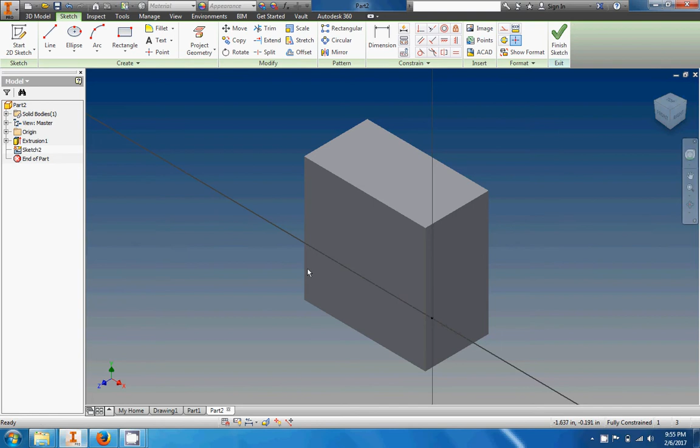Good times as usual. Today we're making the man. It's big man, the big man of the Automoblox right here. So you can see that I already started by making, not that one, I already started by making the base plate 0.575 by 0.575, extruded at 0.3 inches.

So we're going to start with this ellipse right here. Now it says I should use a construction line to locate the center. I think that is a fantastic idea. So I'm going to click the line tool, then switch on the construction button, and I'm just going to scan right here till I hit the midpoint. There it is in green. Then I'll go up until maybe I can find that midpoint right there somewhere. Does not seem to be liking me today. That's okay. So we'll just find another midpoint right here. There it is. Oh, look at that. I made it in there. Okay. So there's my midpoint right there.

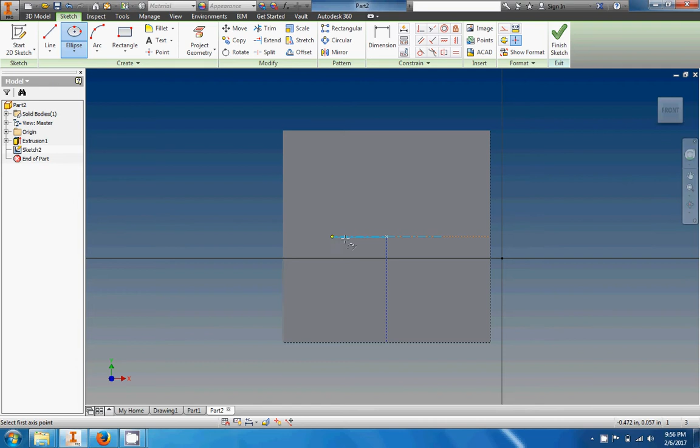Then I'm going to do an ellipse, and I'm going to turn off construction, so I just get my plain old ellipse. It'll be an object line. Then I'm going to make sure my line's flat. It takes, I believe, 3 clicks. The first click sets the center. The second click sets the length of the long axis. The third click sets the short axis.

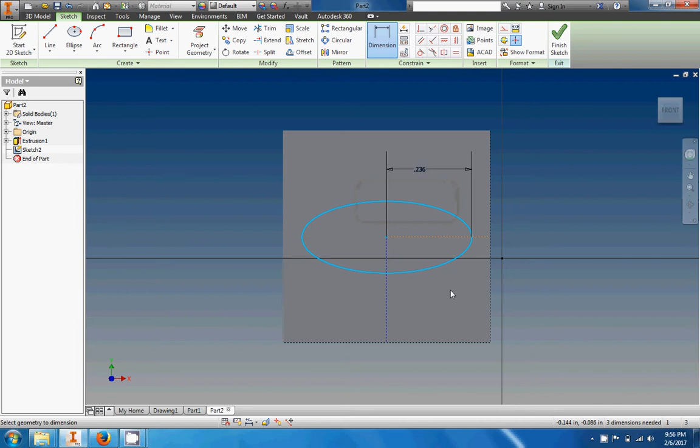All right, then we're going to dimension the ellipse in 2 directions. There's one. What is that one? It is 0.236. And then we'll dimension it in our vertical direction right here. That one is 0.155. There we go. So there's our ellipse.

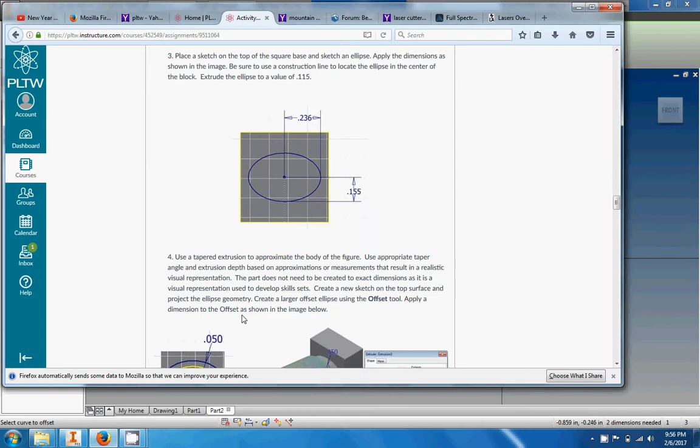And now I believe we're going to do an offset to the outside. Is that right? So we're going to use our offset tool right there, 0.05. We may have used offset already, making the wheel. There we go. Wow, it goes all the way to the edge. Is that what's supposed to happen? It is. Okay, cool. Then it recommends saving the file. I recommend saving the file as well.

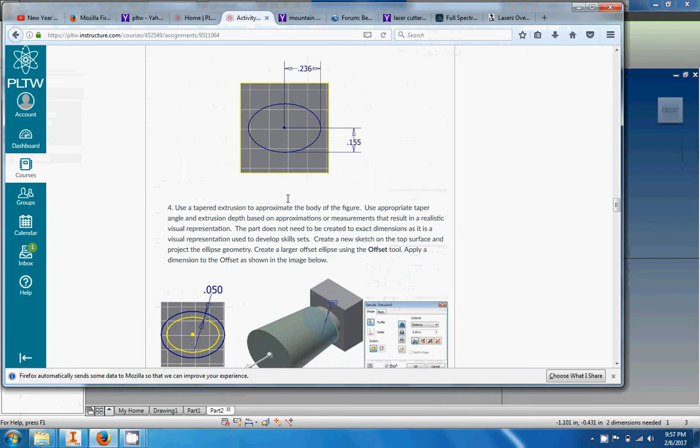All right, so let's see. Are we supposed to do an extrusion here? We are. And we're going to use a tapered extrusion to approximate the, okay. Oh, you know what? I think I skipped a step in here. My bad, guys. So what do we do? We extrude this first one right here. Sorry about that. We're going to extrude this thing in the middle, 0.115.

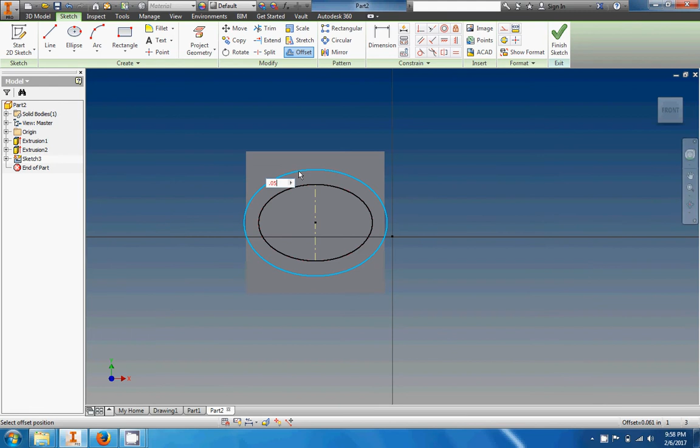There we go. Then we'll start a new sketch right here on the thing, and we'll project the geometry. We love that command. And then we'll go out here, 0.05. All right, there we go. Now we'll finish the sketch, and we'll do an extrusion of both the outside and the inside ring there. Now, if I go over here and I want to do my taper, I can set my taper angle.

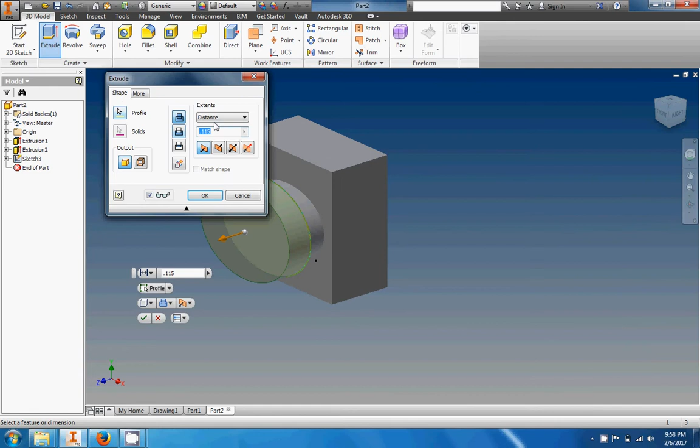So let's look at the drawing here, kind of get an idea. Now, they don't really give us approximations. They say maybe 0.84 for the extrusion depth. They don't really give us any clues as to the angle. So let's just go with what looks good. First, let's set this to 0.84. And then let's just choose what we want.

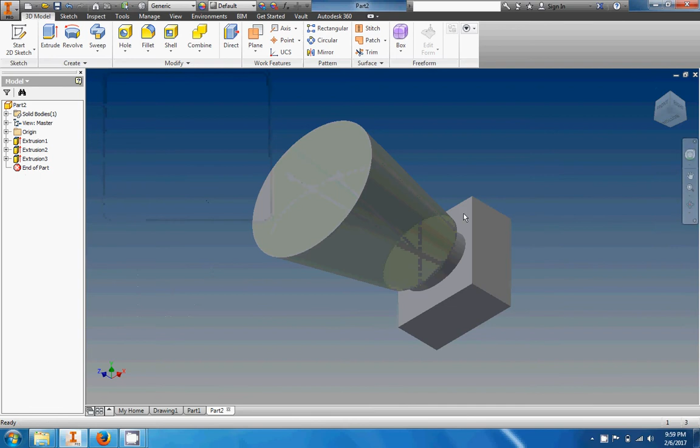Let's start with 1 degree. No, 2 degrees. Oh, 12 degrees. Oh, that looks okay, actually. Maybe we should go 12. That's a big, yeah. We want him burly. We want a big guy. Okay, so we'll go with 12 degrees right there. You could choose a different angle. Probably won't matter all that much. Whatever you think looks good is fine with me.

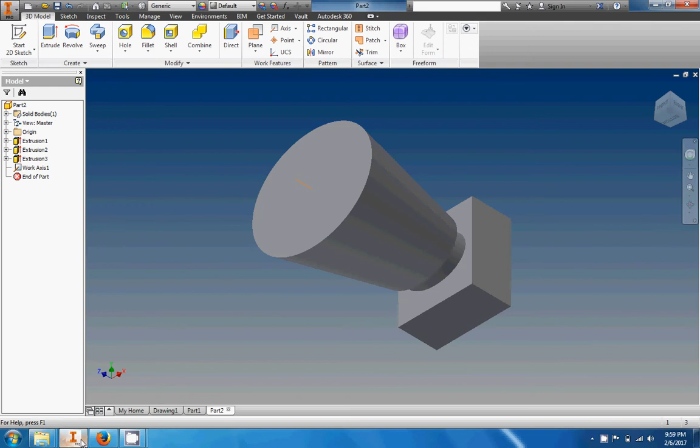And what are we going to do now? We're going to place a work axis through the center point along the long axis of the ellipse of the body. Okay, so we're gonna go to our 3D model, and we're gonna put an axis in there, and I'm gonna choose the specific axis I want, which is through the center of a circular or elliptical edge. Then I'm gonna find an elliptical edge that I can go through. There you go. Perfect. Got my axis right there in the center.

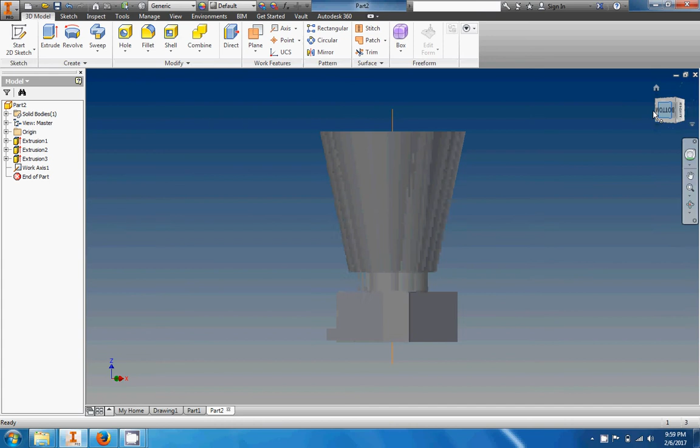So let's see. What do I need to do? I'm going to choose a face of the square base that is parallel to the long axis of the ellipse that was used to create the body. So this is like the long axis right here. And then if I go over here, that's the short axis. So I need to take the long axis, and I'm going to start a 2D sketch right there.

Then I'm going to pull it into view, and I'm gonna slice graphics. I believe that's under view. If you can't find it, you can always go up to here. Is it working? Slice graphics, and it'll do that for you. Perfect. Okay. So let's see what else. Hint: slice graphics, project geometry.

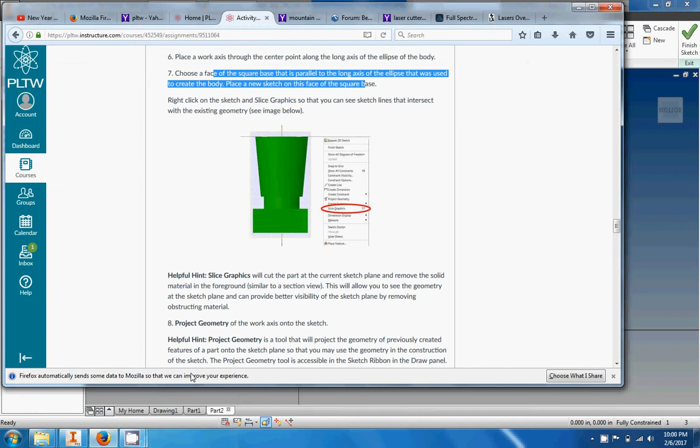Yes, we know about those. We've used them before. So that will approximate the curve of the shoulders on the figure. Do not worry about the exact dimensions. Provide a reasonable approximation of the shoulder figure. Complete the sketch with lines that will encompass all of the existing geometry of the figure below the arc.

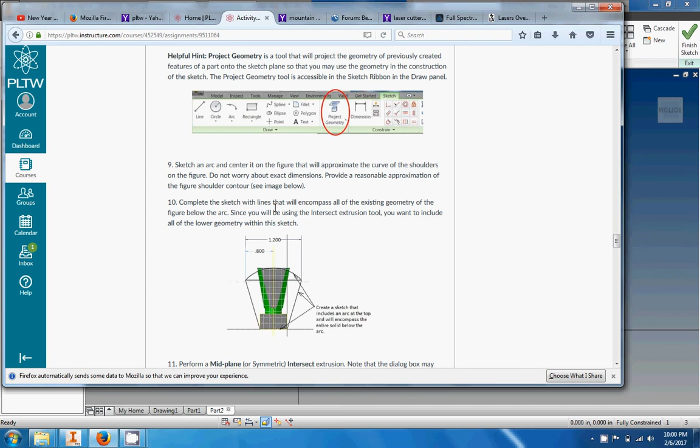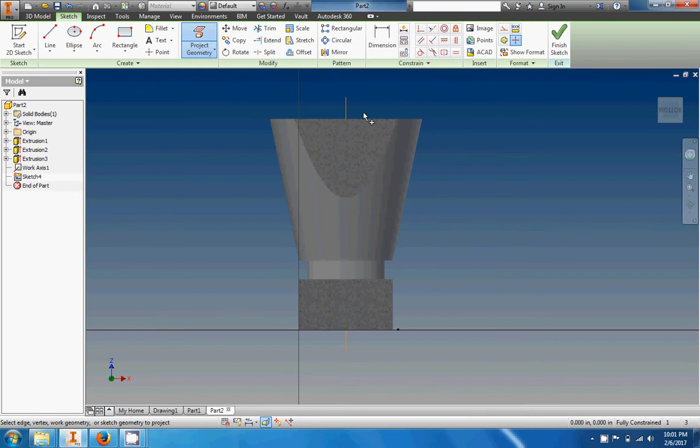Alright, so we're getting to use the intersect extrusion. Finally, that's great. Alright, so we're going to go ahead and make this sketch right here. They offer us some tips, so I think I'll probably take them up on their offer. Let's see. Let's go back to sketch and let's just project some geometry here. Let's get, cancel. Okay, maybe not that. Maybe, okay, we can get that. That'll be good. That'll be useful.

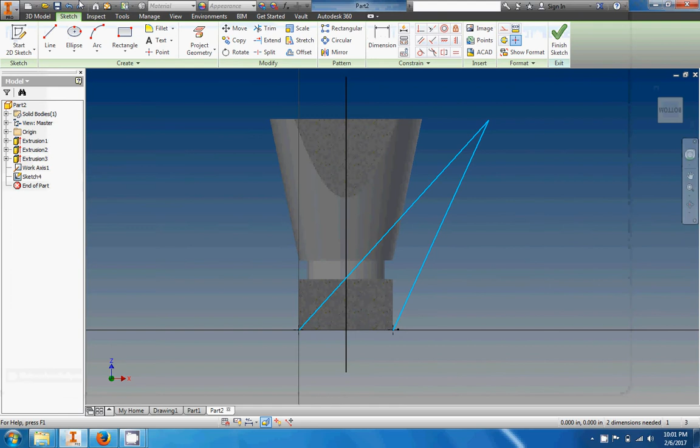We'll go up here, from here to here, something like that. From there to there, something like that. From there, line. You know what? I don't like that second one. Let me look at this picture again. Yes, okay, I have messed up. Okay, so let's see here. Let's go back. Let's undo those. That was a little bit too long.

Let's start it here in the corner. We'll go up to there. We'll jet across here, and then we'll come back down here. Perfect. And then we'll do an arc that is there. Oops. No. That's not what I want. Let's see. Arc tool from there to there, and then up here, right there.

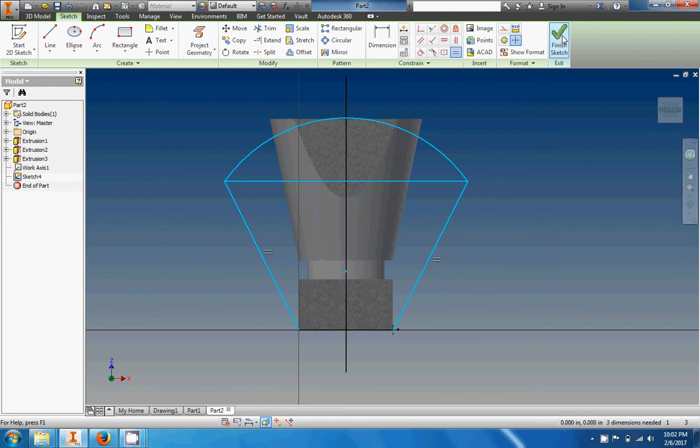Okay, perfect. Now let's just make sure things are equal right here using my equal constraint. Notice I didn't dimension it. I'm just kind of going with it. They said, you know, do whatever you got to do to approximate everything. So now let's go back. Oh, and you know what? I forgot to do one thing. One thing I forgot to do was to connect my closed loop at the bottom here.

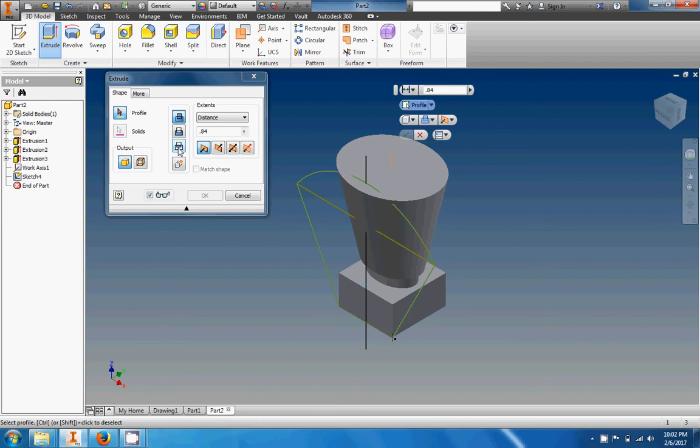Now we're going to use what's called an intersect extrusion, which is really neat. One thing that I enjoy quite a bit is the different types of extrusions there are. So normally we're just used to doing one thing, right? We extrude it, it comes out. This is a cut extrusion, and this one is an intersect extrusion. So basically this is going to make something wherever it finds both sketch and solid. So right there, right there.

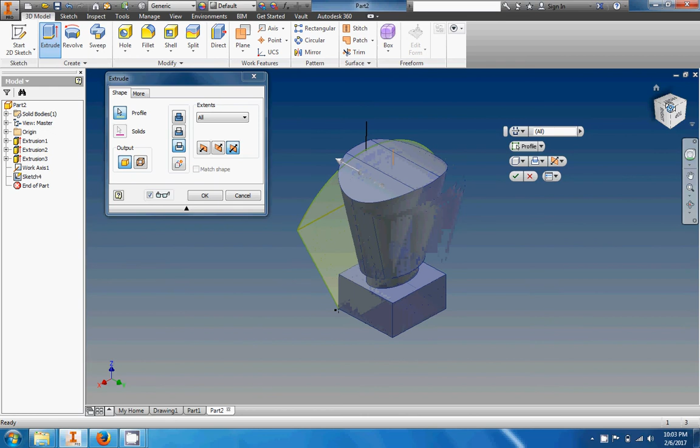Now if I go one direction, you could see what's going to happen is it's going to leave out this little thing right here. So I'm actually going to do a symmetric extrusion that goes in both directions. And instead of a distance, let's just go to all. Yeah, there we go. Perfect. So now anywhere where there was solid and sketch, we're going to have the Automoblox figure. So let's go ahead and click OK. That's an intersect extrusion right there.

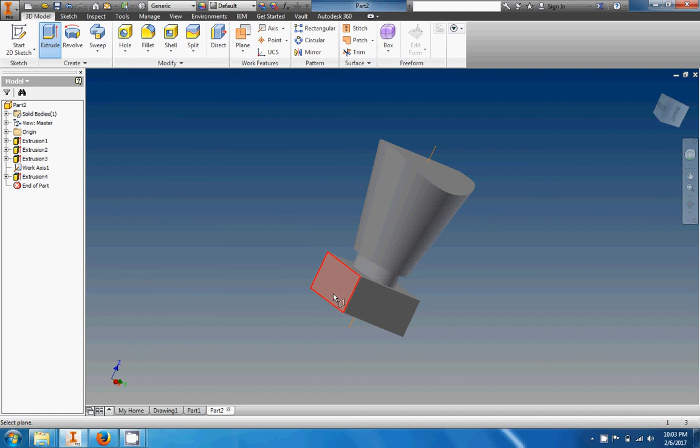Let's figure out what the last thing is here. All right. Create a work plane through the center of the figure and place a sketch on the work plane. Create a sketch to approximate the shape of the head. Do not try to model the shape exactly. Okay, so we're just going to do a revolve to make the head here. So let's go ahead and put a plane in. I'm actually going to do the mid plane between two planes right there and right there. Okay, perfect. Now I'm going to start a 2D sketch right here.

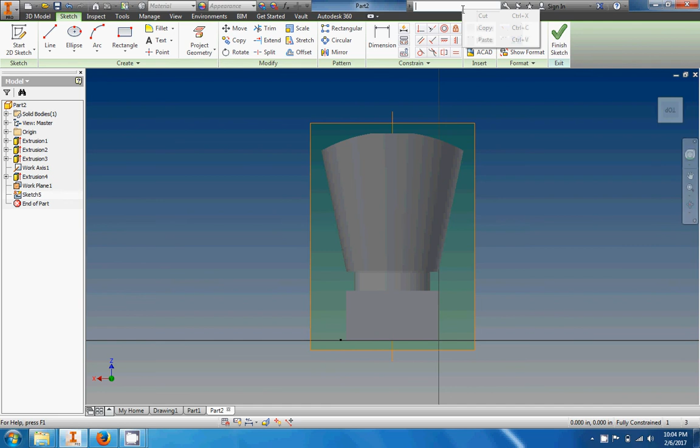One of the tricky things about working with planes is that you have to click on the edge of the plane in order to do it. So I clicked start 2D sketch. Now I'm clicking on the edge of the plane to start that thing up. All right, should I slice graphics? Yeah, why not? Let's go ahead and slice them. There we go. And we'll go to our sketch and make some kind of just line and arc, not too big, not too small. And then we'll do an arc right there to right there and something like that.

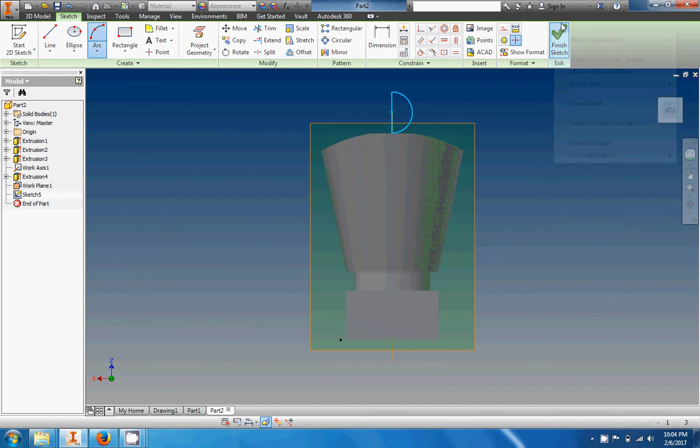We'll finish the sketch. Now you could probably do a little bit better if you use like 2 arcs and a line. That might turn out a little bit better if you're interested in that. For now, let's just go ahead and do that. Okay, he'll just have a round head. We'll take it. You know, we could do a little bit better. Should I be fussy? Why not? Always reach for the best, right, guys? We believe in that here. No. Okay, now we're going too far.

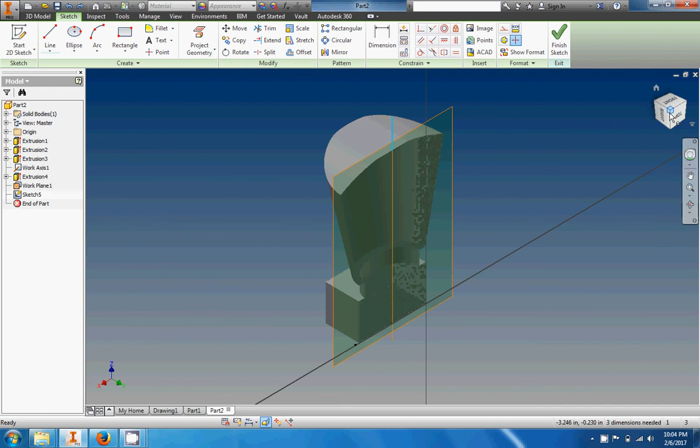Yeah, okay, slice the graphics. Okay, so let's go back here. All right, there we go. So we're looking at it again. All right, so let's do an arc from there to there, and hopefully this will actually look better. We'll see. Then we'll do a line from there to down there, and then we'll do another arc. This might just look worse, which will be mildly depressing, but we'll get over it. All right, finish the sketch.

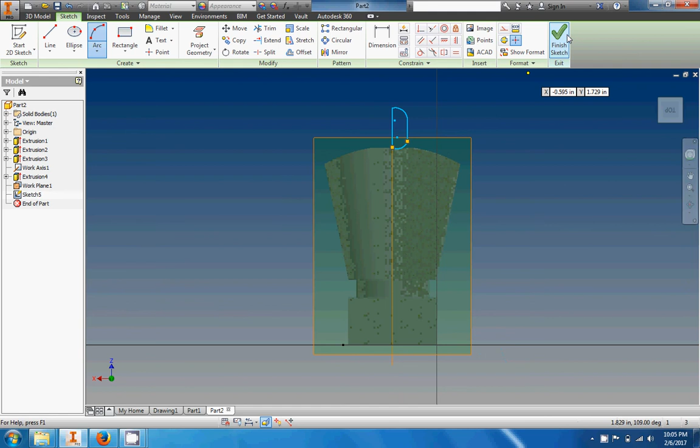And we'll go for a revolve around that line right there. All right, okay. So that looks slightly more head-like. You could convince ourselves that he has a jaw and all that. Anyways, there's how you make the Automoblox axle. That's how you do it. Thanks.